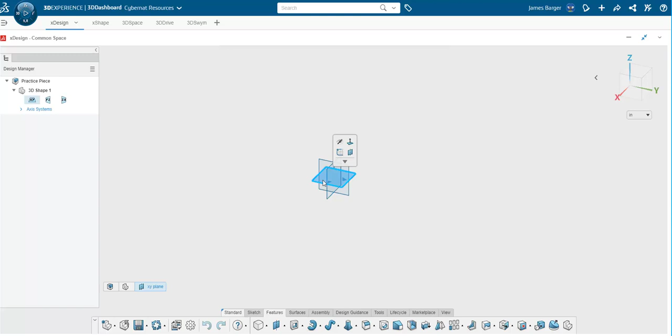Alright, so once I'm there, now I'm in my new file, I want to do a top-down approach. So I'm going to click on the Z-axis. I'm going to tell it to open up or create a sketch. And now I'm ready to start designing.

First thing I want to do is go down to my sketch tools and draw a rectangle. Start at our origin, draw any size box. Now obviously I want to draw this so it's not going to take a lot of material, and it needs to fit on the table on my CNC machine. So again, this is just for practice.

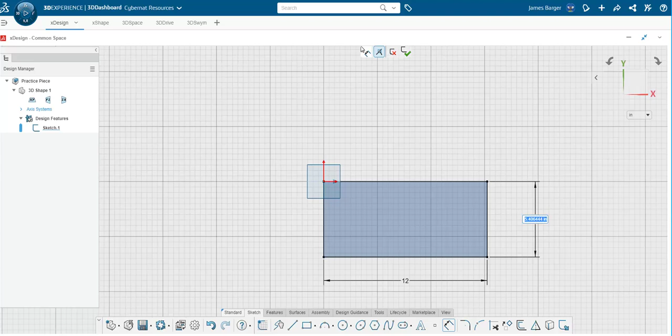Let's set our dimensions at 12 inches long. And we're using a 2x4. So a 2x4 is not actually 2 inches by 4 inches. The 4 inches is actually 3 5/8. So let's set that width, and then let's go down to features and extrude this.

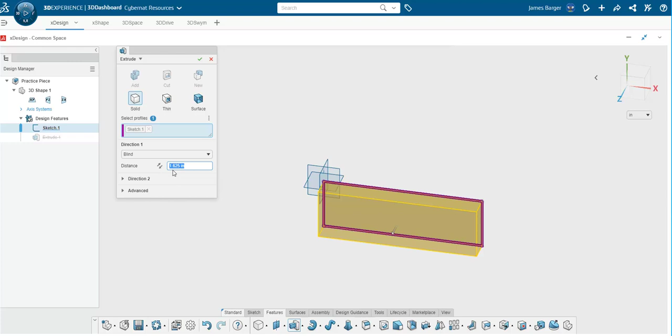And just like 4 inches isn't 4 inches, 2 inches isn't 2 inches. It's 1 5/8. So we'll set our depth on our extrude at 1.625. Extrude it, and there's our solid block. Wow, we drew a 2x4 inside of xDesign. Isn't that amazing? Well, for this project, it'll work.

But I just don't want it to cut a 2x4. I want it to do some other things too to make sure that all my settings inside of my software on my CNC are correct, and that the machine is cutting correctly and accurately. So let's go down into features on the tools, and let's put a fillet on our piece of wood. And when we hit fillet, it pops up and asks us if we want it to be full round or constant. We're going to use constant.

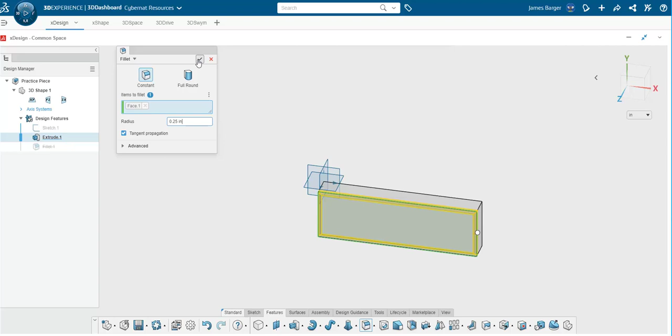So let's select that face, because that's going to be our top face. And we'll set the fillet for 1/4 inch. Click, okay. As you can see, we now have a 1/4 inch fillet. But let's go a little further on this, let's put some holes in the center just to see what we're doing here.

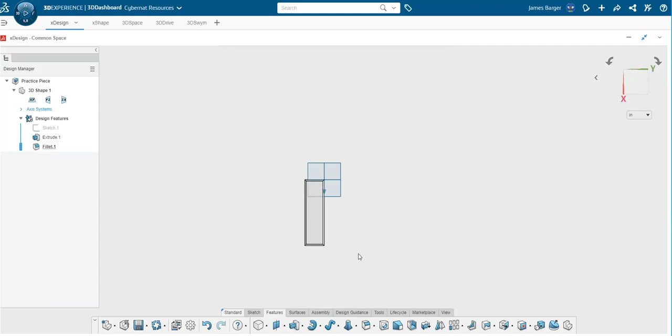So let's go and square everything up so we can see what we are doing. Go back to sketch, select the circle tool, tell it which plane we want, and let's just draw some circles. Now we need to extrude cut that circle.

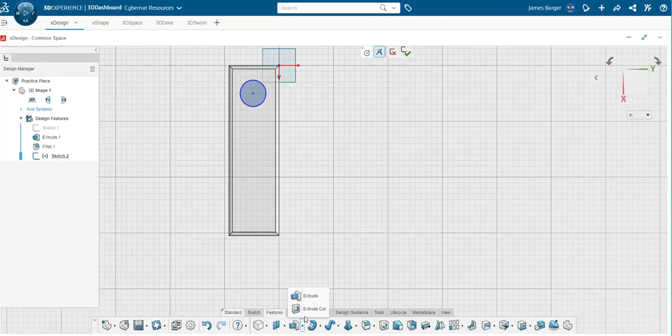We're dealing with 1 5/8 thick material. Let's extrude cut that hole. Let's not go all the way through, let's just go down 1 inch. Cut that. Now we've done a hole. It does not go all the way through, it only goes down 1 inch. That'll give us some test of our Z, our z-axis on our CNC machine.

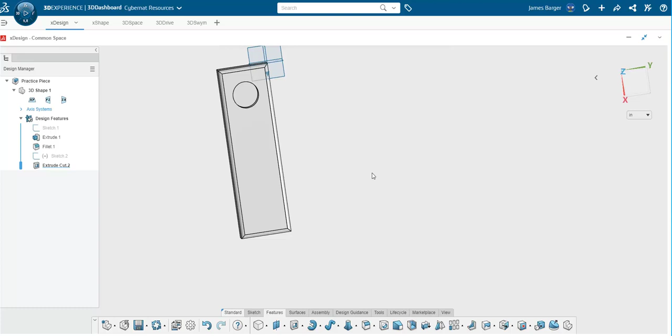I can, after we're done cutting this, go in with my calipers and measure that, make sure that the setting is correct. So let's go again with another circle. Select my face, and let's do a hole this time offset from the center.

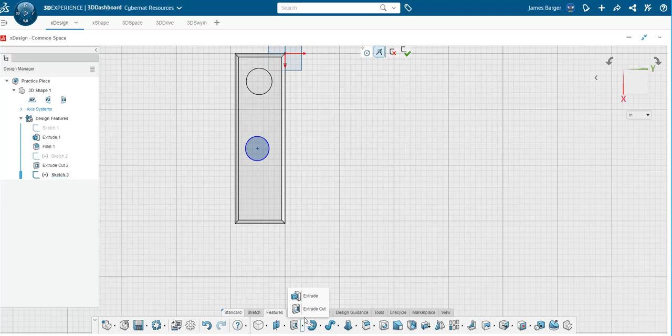And you can make these any size you want. Let's extrude cut that one, and let's go all the way through on that. So our thickness is 1.625, so we'll set it for 1.625.

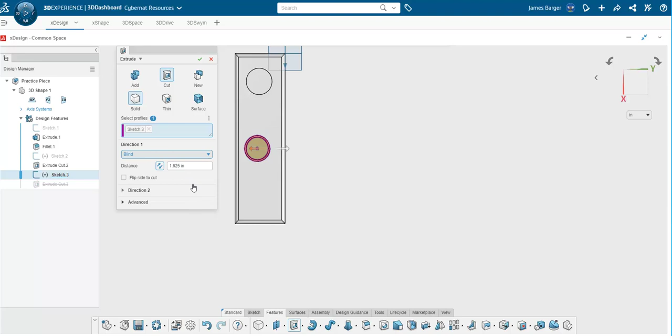You could also go up here and select through all one way, both geometry, next, body, whichever one you want to use, but I'm just going to let it be a blind because I know that's what the thickness is. Cuts it through, and you can see now that that hole goes all the way through.

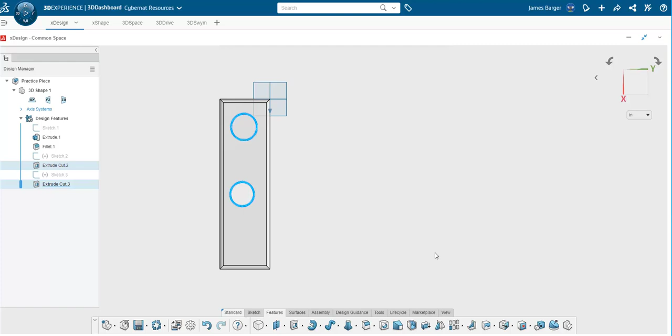Let's go back and also put a fillet on the top plane of our circle. Click on your circle, hold down the Control key, and click your other circle. That highlights both of them. Come down to your fillet tool, and notice how both circles have been selected in your items to fillet. Again, we're going to set them at 1/4 inch, constant, click it, and there they are. So that's going to give us a basic piece to put on the CNC machine to test the accuracy of the calibration done on X, Y, and Z axes.

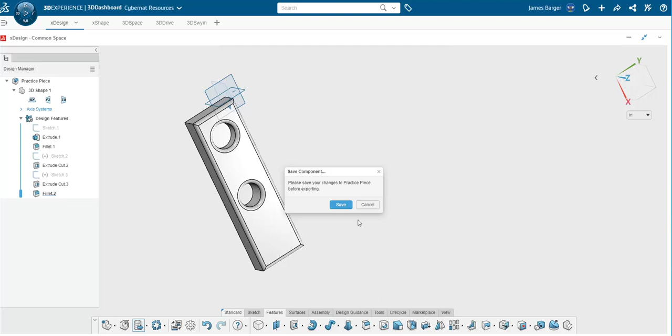So I want to save that. Let's come down here and tell it to export. Oh, I haven't saved it, so it's telling me to save it. Good thing to do is save often, especially when dealing with software out on the internet, as any software. So where do I want to save it? I want to save it as a file on disk. You can change the name here if you want to. I'm going to leave it as practice piece. In my file format, I always save my files in 3 different formats.

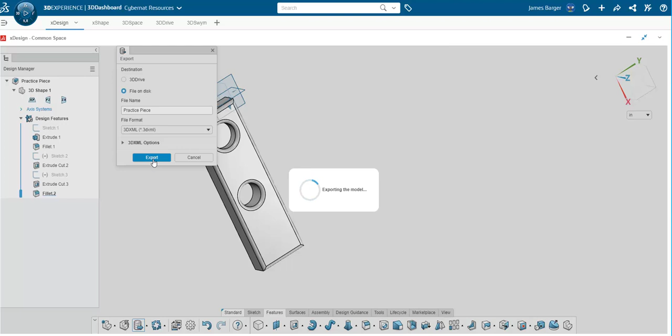I save it the first time in the standard 3dXML file, which is standard xDesign. I'm going to click export. It goes out there and does all the calculations, all the math. Pops up, says, where do you want to save this? Well, I have a folder called CNC table that I've been saving my files to, so I'm going to save it there. So there we go. Click save, and boom, it's saved.

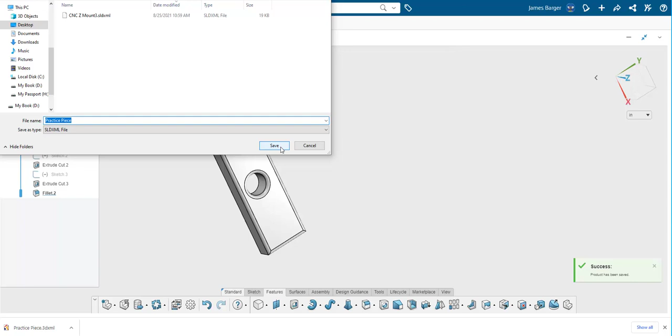Now I also want to save this. I'm going to click export again. When it comes up, I'm going to use the same name, file on disk, but change my format to SLD XML. Those are your choices, but SLD XML is a SolidWorks file, so that if for some reason my internet's down and I just got to have this changed right now, I could pull up my version of SolidWorks on my hard drive and make the changes. So I'm going to save it as a SolidWorks file, in the same folder with the same name, different file type, so it's not going to overwrite the previous one.

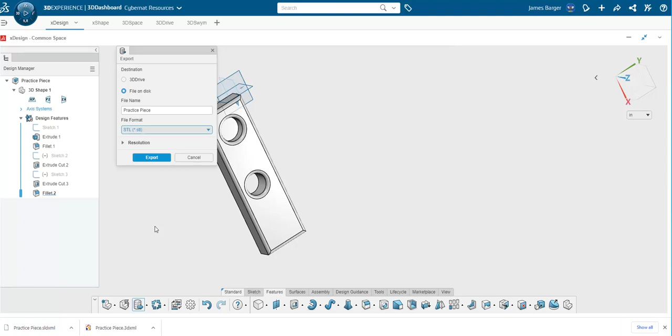And then, in order to pull this file up into my slicer software so I can convert it to G-code, I'm going to want to save this as an STL. Now some of you are saying, 'Hey, you can do that from SolidWorks.' Yes, you can. But not every slicer software, either for 3D printer or for CNC, accepts every file out there. So I always save into 3 different formats so that depending on what software I'm using, one of those 3 formats is going to work where I can pull it up. So save as an STL file, using the same name. Boom, I have it saved as all 3: an xDesign file, a SolidWorks file, which are interchangeable, and an STL file, which I can also pull up in either xDesign or SolidWorks.

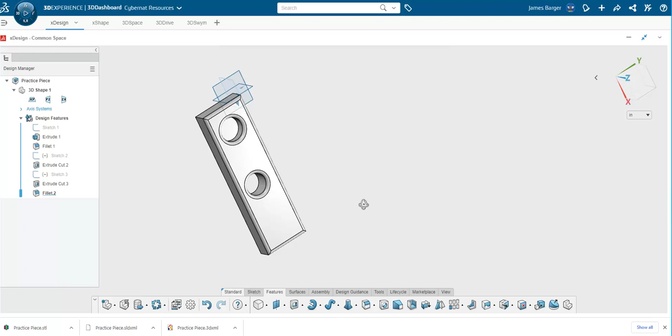All right, so that brings us to a closure of designing this small piece for CNC. And you could use the same piece for a 3D printer. You could enlarge it, you could make it smaller. If you wanted to do some scaling and practice using the scale function, both in xDesign, SolidWorks, or your slicer software, you can do that. Again, I highly suggest that before you try to 3D print or CNC anything, especially when you've made changes to your machine, you always do a practice piece. It's always good, the more knowledge you can gain, and every machine has its own little nuances, whether it's a 3D printer or a CNC machine, and every software has its own little nuances depending on what you're using for CAD design and or your slicer software.